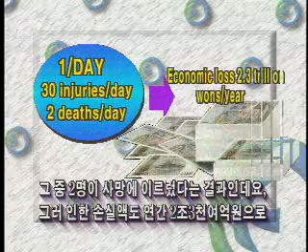It means that 30 people were injured and 2 were dead every day. And in terms of money, we lost 2.3 trillion won a year. With that money, we could have built as much as 42 Olympic bridges.

However serious the accidents might have been, we could have prevented them if we had paid a little more attention. Let's have a look at the accidents that really happened during this year.

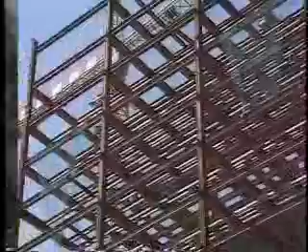It took place on May 6th at a construction site of a high-rise building in Seoul. The building is designed to be 19 stories high with 6 stories underground, and there had not occurred any accidents at all.

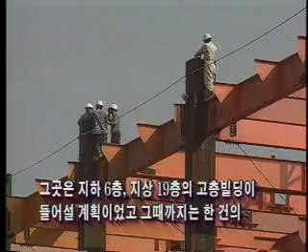Okay, check your safety helmet. Mr. Kim, fix your helmet. Looks nice, doesn't it? Fix your chin straps.

The safety helmet is nothing but a protective device, and it doesn't mean everything. Please pay your attention to the safety regulations at all times.

Repeat after me: My safety helmet is my life helmet. My safety belt is my life belt. My observance of safety regulations keeps my workplace and my home safe.

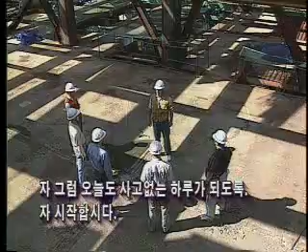Now let's make it accident-free today. All right, let's go.

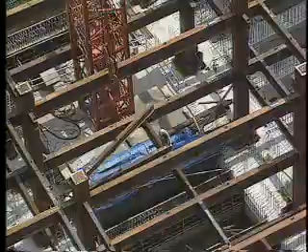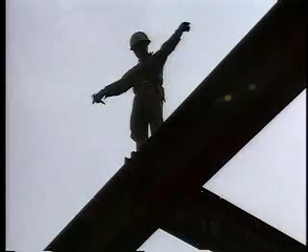Mr. Kim was assigned to do welding on a steel frame on the 8th floor. He worked so hard, and soon he began to sweat on the forehead in a hot summer day.

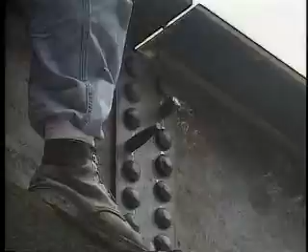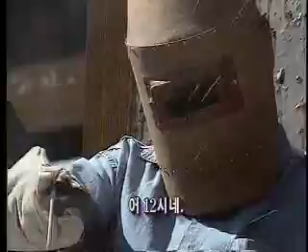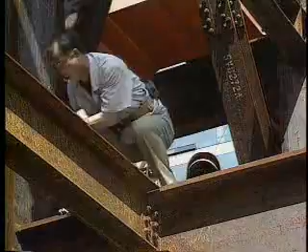It's 12 o'clock. It's lunchtime already.

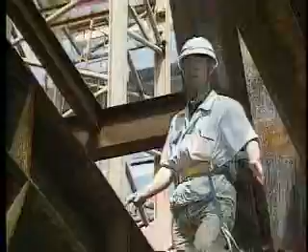Mr. Kim, let's go down for lunch. Already? What do you mean already? It's noon. We work for a living, and we can't work without eating. All right, I will be with you right after I clean it up. Come on, hurry up.

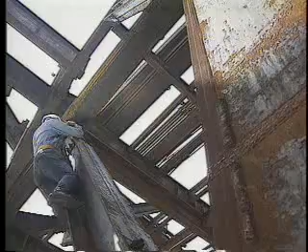Mr. Kim was taken to a hospital in a hurry, but he was dead on arrival without leaving even a word. He had a wife and young children, and no one knew it would be the last goodbye in the morning.

The accident could have been prevented. Let's have a look at the picture of the accident.

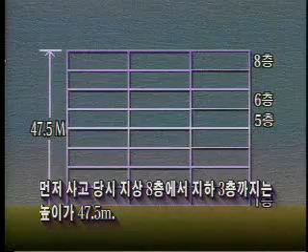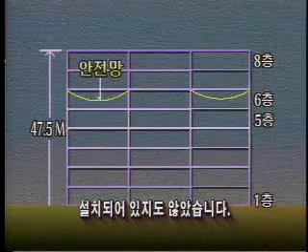It's 47.5 meters high from the 3rd floor underground to the 8th floor. And the safety nets were installed at the 6th floor and the 1st floor underground. But the safety net at the 1st floor underground was taken down due to the work procedure. In addition, the safety net was not installed in the core part of the middle section of the building.

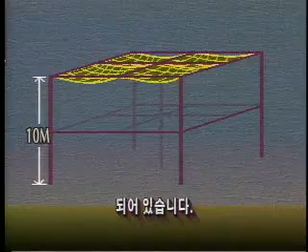It is stipulated in the regulations that a safety net has to be installed every 10 meters of height, all around the building without any opening, and the safety net has to be manufactured with enough tension force. If a safety net had been installed at the site, it could have saved the life of a man of 35 years old.

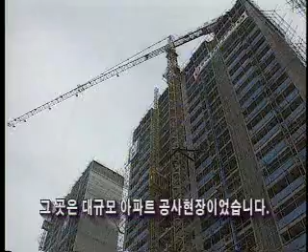I will show you another example that happened in Busan. It was a large apartment construction site. It was about 8 o'clock in the morning on the 4th of June.

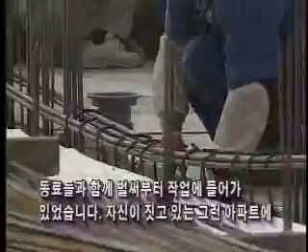Mr. Che, a carpenter, already began to work with his co-workers. He had begun his day on the 16th floor to do his work.

Wow! Could I live in an apartment like this? What a high-rise apartment this is! We're already on the 15th floor. Who on earth could live in this apartment? That's what I'm saying. There is a man who builds an apartment and another one who lives in it.

Let's start to work on the embankment over there. All right.

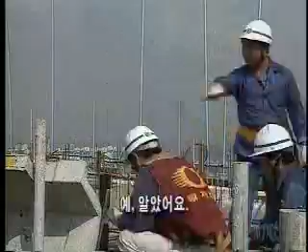Mr. Che, a carpenter, and co-workers were assigned to assemble a form that was pulled up by a crane. The form weighed 2.92 tons apiece, and it was a job of high risk.

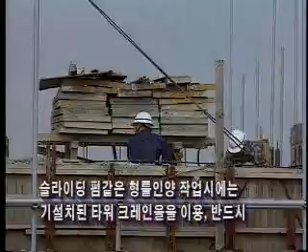When pulling up a form like a sliding form, a tower crane has to be mobilized. An anchor bolt is fixed at the base of the form with 2 points secured for the pulling up. But because the tower crane was mobilized for another project that day, they used tripod chain blocks only to fix the anchor bolt. This was an unsafe position to effectively support the heavy form.

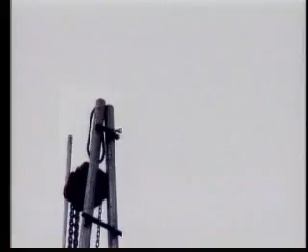And so he died. As you've seen, accidents always occur when you do not observe the safety standard. However simple a safety standard may be, a major accident could occur if it is not observed at all. It's no use regretting over what has happened already. It's too late.

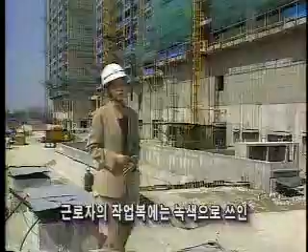We can see safety first in green colors on the working clothes, and also many safety slogans and posters in and around a construction site. In spite of this, we are still far behind the advanced countries in terms of safety consciousness. In terms of accident statistics, we are about twice as high as Hong Kong, Taiwan, and Singapore. But fortunately, we can see a construction site where the accident-free movement is being practiced well.

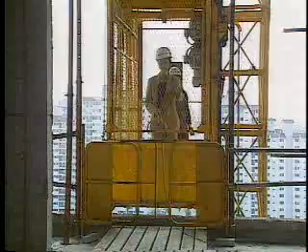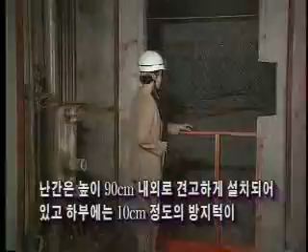This is a construction site for an apartment. What is outstanding here is that even an accident has not occurred until 70% of the project is completed. Here we can see a guardrail of 90 centimeters height, and also at the bottom of the guardrail we can see a toe board of 10 centimeters in height.

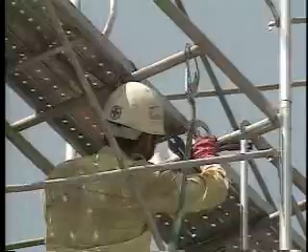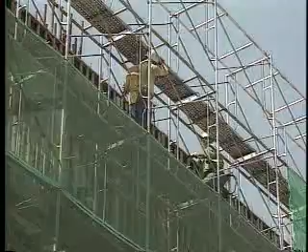Our working platform has to be entirely covered and fixed to a supporter.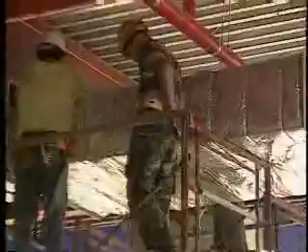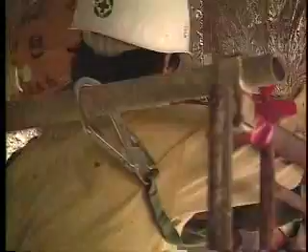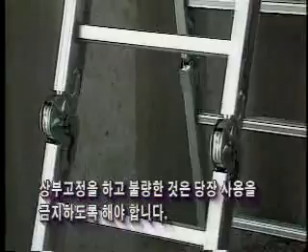When the upper part of a ladder is not fixed or a ladder is made of poor materials, it slips away and is likely to cause an accident. Therefore, you have to attach a slip-proof device, fix firmly the upper part of the ladder, and take a measure to prohibit the use of ladders of poor quality.

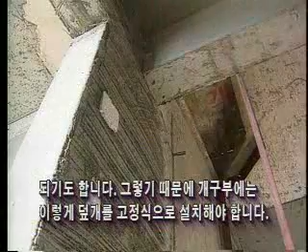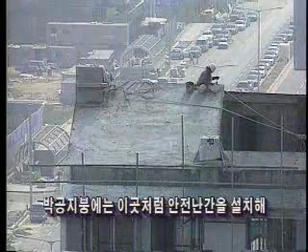This opening could cause an accident at any moment. Because of that, it should be equipped with a solid cover like this one. Also, for this big opening, it's safer to install a safety net along with guardrails. Wouldn't it be much safer with these safety precautions? If a guardrail is installed on the gabled roof, it could prevent workers from sliding down from the roof.

In addition to these safety measures, let's take a look at what kind of safety measures we could use.

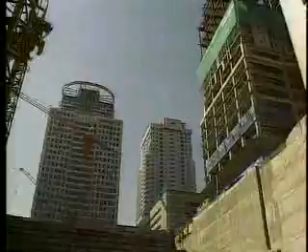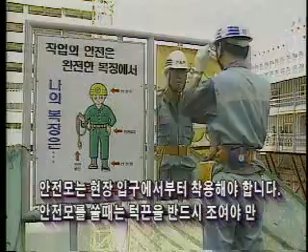A safety helmet must be put on at the entrance of a work site, and the chin strap must be fastened tightly. Passages of the work site must be designed to be safe and efficient for work. Always keep your working area cleaned up.

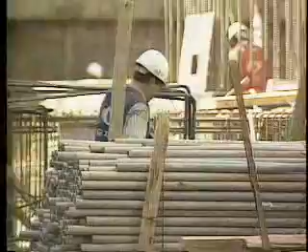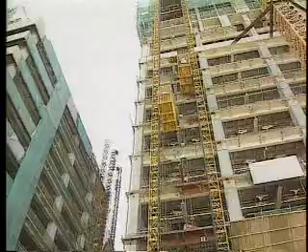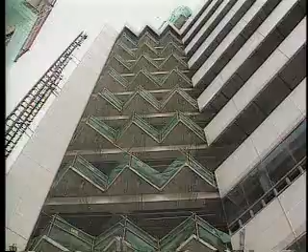A lift is a convenient tool to transport man and cargo, but it also causes many accidents. A vertical safety net has to be installed around a lift to prevent accidents. A door at the entrance for the lift must be set up at each floor. Always keep elevator entrances closed and put a solid cover on the opening.

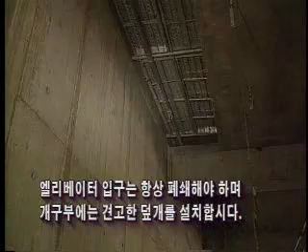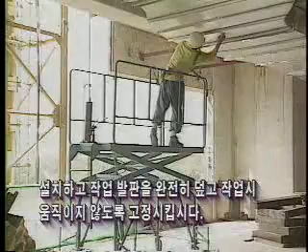When a working platform is set up in the wrong way, it may cause an accident. Be sure to set it up with proper guardrails to cover the bed of the working platform entirely and to keep it standing still while working. A safety net must be installed at every 10 meters of height.

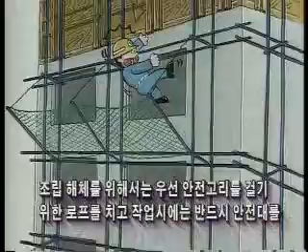In order to assemble or disassemble a sliding form, be sure to install a rope and to hook up a safety belt on the rope for safe working.

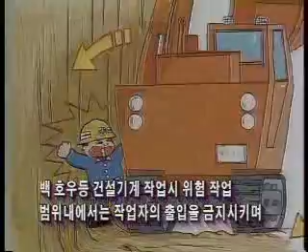Do not let anyone in the work site when a backhoe is working. Be sure to assign a signaler for safety and to follow the instruction of the site manager.

Do not throw off waste from construction materials like bricks, timbers, etc., but dispose of them at the temporary dust chute.

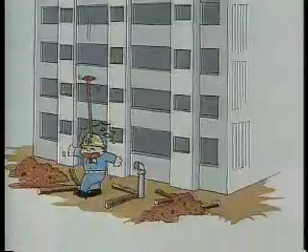Be sure that electric appliances and machines like submersible motors must be grounded. Also be sure that a ground fault circuit interrupter must be installed at the panel board and to check whether it works properly.

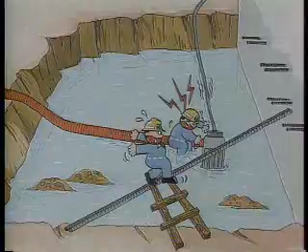Be sure the angle of digging has to be set up to protect against a landslide, and the guardrail has to be installed on the digging area.

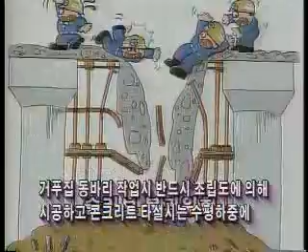Be sure that a form and a pipe support has to be set up in compliance with the drawing. Also be sure that the pipe support has to be set up to maintain the weight of concrete loading.

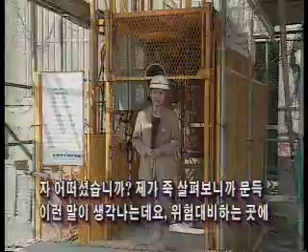I was reminded of a saying: no danger comes through thorough precaution, and no accident comes through thorough preparation.

Based upon the examples you have seen, safety can never be accomplished by slogan or verbal commitment only, but it can be achieved when it is actually put into practice. It means that a worker himself practices safety, and this is truly the shortcut to safety.

Bear in mind that a worker himself and his family are the victims, not the society or the country, of an accident caused by whatever reason it may be. Therefore, am I not the first one who should conduct safety right now?

Next, let's talk about a team leader who lost everything at once through just one accident.

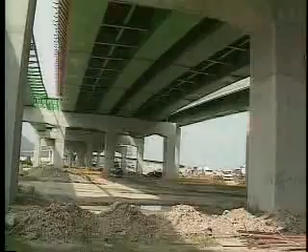It was a construction site for a bridge that was regarded as a difficult task. The project was to build a 1-kilometer-long bridge linking the Yongsan and Kupo areas. The bridge is 4 lanes wide, and it was almost completed since construction started in November 1991.

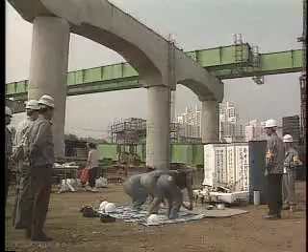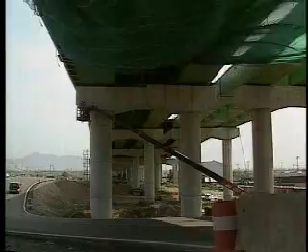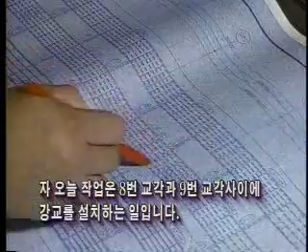Well everyone, we are going to lay a steel box girder bridge between the 8th and 9th pier. Don't be careless about safety simply because we do it every day. Be sure not to miss any of the protective equipment for yourself.

Captain, the crane is ready. All right, let's go.

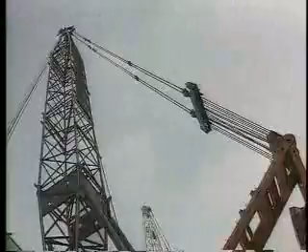The steel box girder bridge weighed over 50 tons, and it was not an easy task to lay that heavy bridge on the pier.

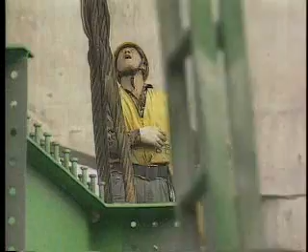Two mobile cranes of 80-ton and 100-ton capacity each, and more than 10 workers, were ready at 7 o'clock in the morning.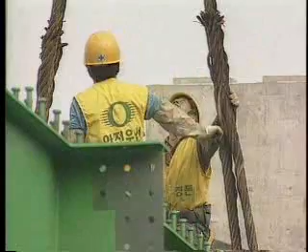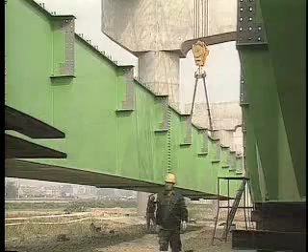The safe work process is that the steel box girder bridge has to be elevated 1 meter above the ground, and then the safety blocks have to be mounted under the steel box girder bridge.

But unfortunately, while the steel box girder bridge was being lifted by a mobile crane, Mr. Lee was working under the 50-ton bridge without the safety blocks having been mounted.

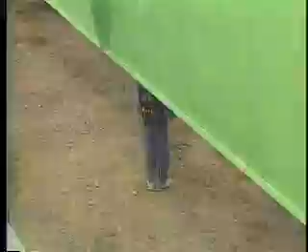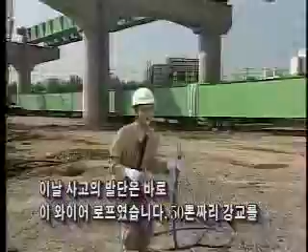Mr. Lee, a career construction engineer and the team leader for the site, passed away. It was the wire rope that caused this accident. The wire rope began to tear off when the crane was pulling up the 50-ton steel box girder bridge. As a result, Mr. Lee lost his life.

It's quite likely that unexpected situations happen at construction sites, and this often leads to the death of a man. Now today, let's have a look at how to tie this wire rope.

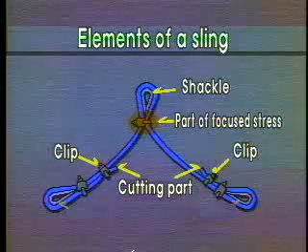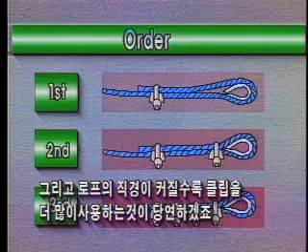First of all, you have to use a clip to tie a wire rope. It is very important to practice on this occasion how to tie a wire rope. Never forget to use a clip to tie a wire rope.

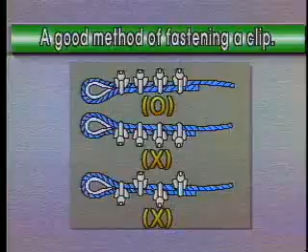You have seen the real cases of major accidents and also the reference construction site. How do you think?

I am convinced that all of you have realized how important safety regulations are. Even a single safety regulation, if not followed, may put someone to death. The death of the 3 people that you saw also took away the happiness and future of the families left behind.

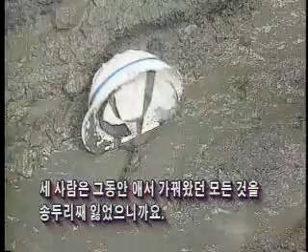What they paid for the carelessness of a moment was too great. They lost everything that they had kept for life. They lost their lives, and, what is worse, they left their families with deep sorrows and pains that last for a long time. No one can remove the sorrow from their families.

There is no shortcut to safety. Respect the principle of safety without ignoring even a simple or minor regulation. The shortcut to safety is to put it into practice by myself right now.